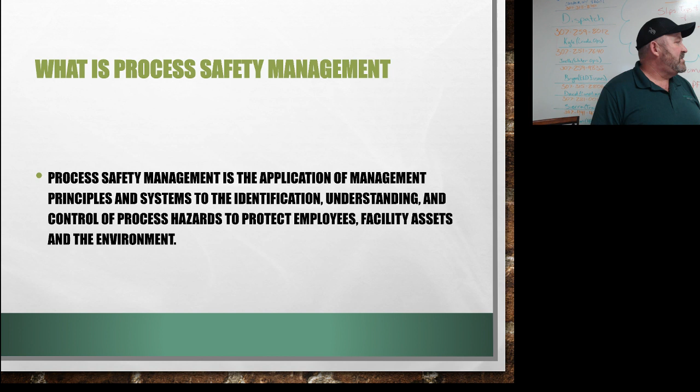This week is one of our OSHA 1910 required topics, which is process safety management. Where did all this stuff come from? It actually happened out of, where the heck was it, a chemical release in Bhopal, India, where over 2,000 people died from a release of a chemical. Businesses have an obligation to protect their employees, but they also have to build a plan to make sure if we had an incident, it doesn't grow huge. So basically, it's to avoid that. You build a process to avoid that.

There are 14 elements involved in process safety management. It's pretty much an elemental approach where we apply things and get employees' participation in it. Then we process the safety information as to what kind of volatile stuff we're working with.

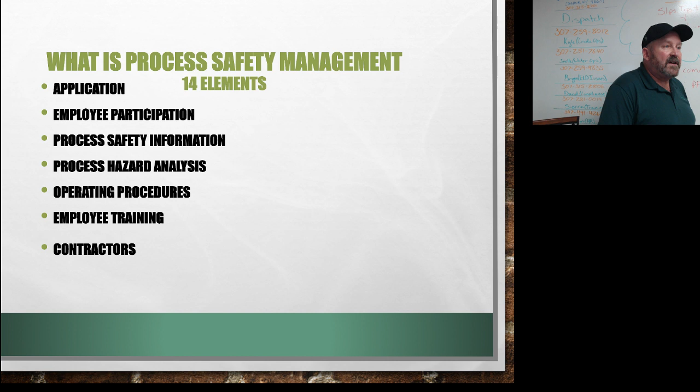A hazard analysis, just like your JSA. Our operating procedures, we do employee training. We have to train our contractors in this program also. Then pre-startup safety review is if we're starting a new process, we need to review it. Have we mitigated all the potential hazards, problems, issues? We want to talk about mechanical integrity of equipment and the conditions it's being used in. If we got hot work permits and stuff going on, non-routine tasks like confined space, we got to talk about that. And management of change, incident investigation, and emergency planning and response.

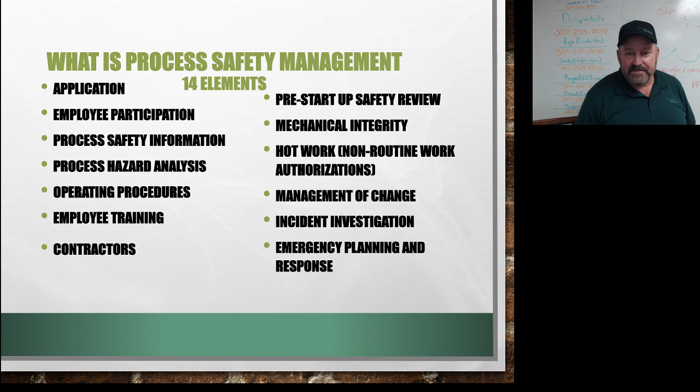So, do we have this program in place at Prairie? Any ideas? I'd say yes. Yes, we do have it in place here. Some of the stuff we do does not require it, but we do have it in place, and we try to keep it updated and working properly.

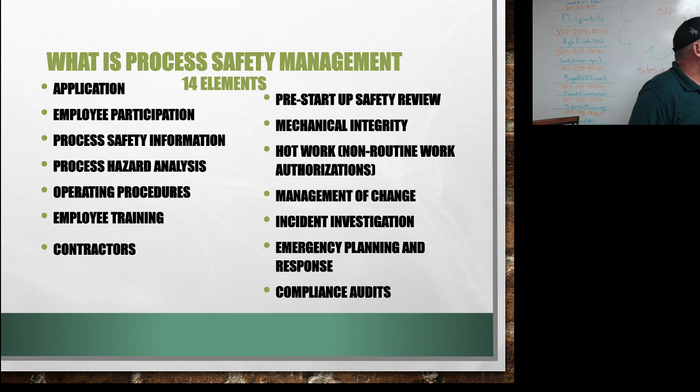The big thing is because of these compliance audits. Not only DOT, but OSHA, all of those good folks that kind of intermingle. I'll talk about them because those are the spider webs. Part of the stuff you do is DOT governed, part of the stuff you do is OSHA governed. What are these elements into this stuff?

If my thing will go forward... there we go. It's the Federal Regulation 1910.119A. It's the application of a program. What it talks about is listing toxic and reactive agents in your work area and what happens to these if there's a catastrophic event.

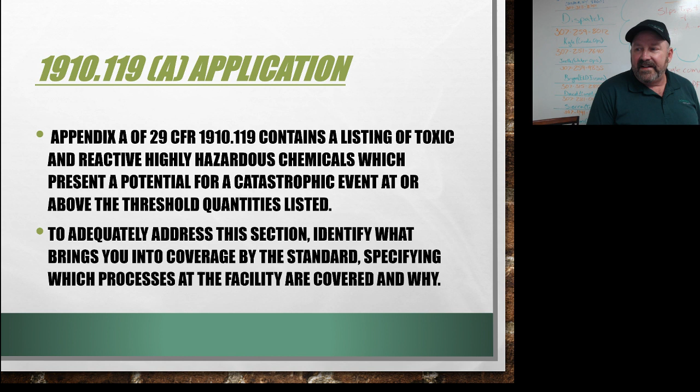We want to let people know what we have around here, and we want to teach you what to do in case of a situation. You know, like do we want to store 10,000 gallons of motor oil here? Probably not, because then we fall into this realm of different reporting and processes if there's a release.

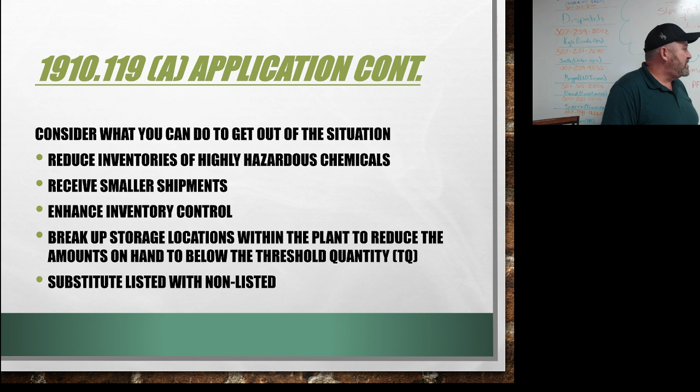We don't hold the amount of chemicals in this facility, or the Texas facility, or Gillette, to warrant this full-blown program, but if we do run it, if we do have issues, OSHA looks at that very kindly. This was a pool chemical process where they had chemicals that were not commercial or reagent grade, so they didn't have to build any kind of safety process, but they had an issue there with chlorine gas and all kinds of issues.

All of us, you're frontline workers, be it in the shop, in the field, even the staff people, we need to make sure you guys know the processes because OSHA knows it, so should we. How do we involve you in this process? Audits. We look at you. Are you following your processes on location?

Part of it is training, when you come in and take classes with Sierra for your annual training. The other part of that is safety meetings, because some of your training comes right from these, that she's able to sign off in ISNetworld that you completed. Anybody have a clue what the fine is for missed safety meetings from OSHA, to the individual, not to the company? $250. 10 grand. Oh, way off. So it pays to come to these things.

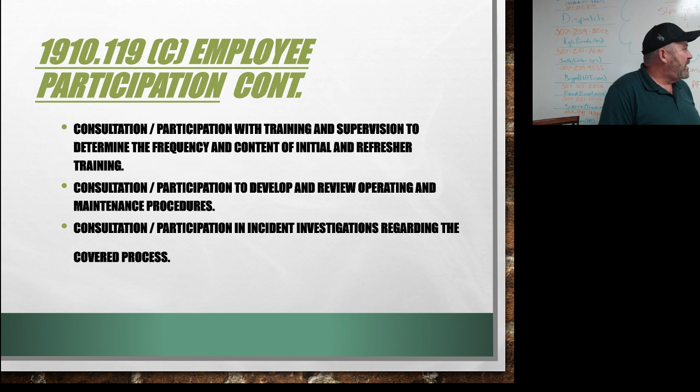So we involve you in that, but we need you to speak up too. If you see processes that aren't right or unsafe, you need to tell us. We need to look at that process to make sure we can mitigate it, try to remove a hazard, or find a safe way to do it.

How many of you have ever grabbed the SDS book there in the shop and seen what we have in this building? There's every SDS of everything in here because we're a commercial building. So yes, you will find the Glade air freshener in the bathroom's SDS in that book. You don't have to do that at home, but we're a commercial business, so we have to have all that stuff in there.

And that's another one of those dead trees that OSHA likes to talk about - nobody ever checks it, goes through it, makes sure you're current with everything. We should be looking at that every time we bring in new chemicals and all that.

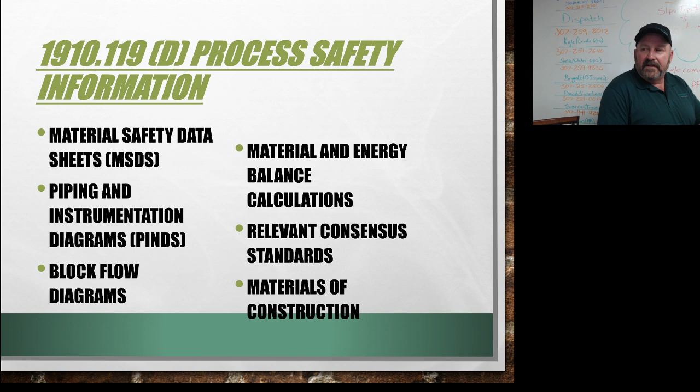You know, all the diagrams, materials and energy balance, they're talking about lockout, tagout on some of that stuff. We need to follow all those requirements in the 1910 series. But it really encourages you guys to participate in this process.

And then OSHA likes to use the term process hazard analysis. But you guys do it every day, don't you? What's the first thing you do when you get to a location? You have to fill out a JSA. Yeah, absolutely, you have to fill out that JSA.

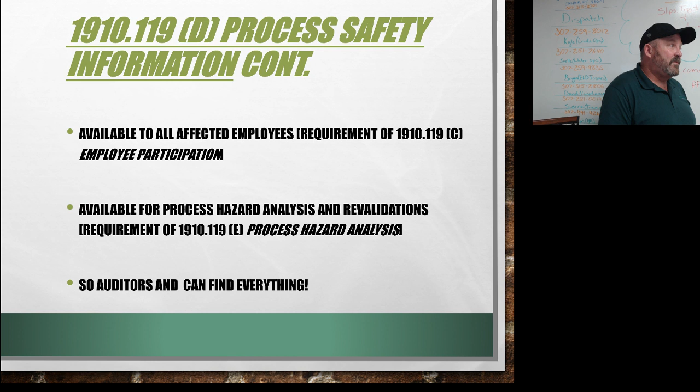And we need those so there's a paper trail that an auditor or an inspector can follow and find. We have to have those available to them, because without them, we're not following the proper processes. Because again, we don't want this kind of thing to happen.

You sit down, either you're just looking at a JSA, looking at your hazards, or two or three or more of us working a task together.

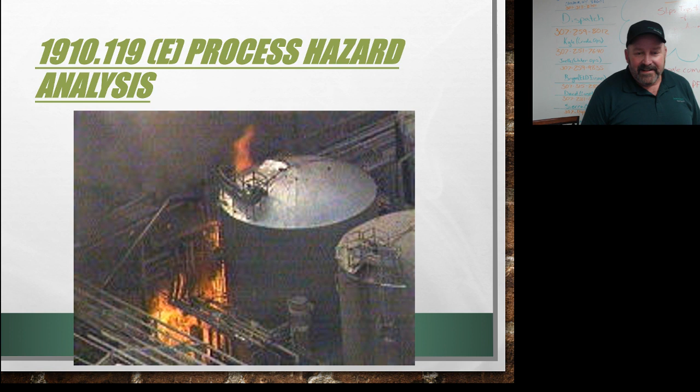And who should participate in this JSA, this risk analysis program? Any clue? It's anybody and everybody that's involved in the task at hand. They need to participate in that.

There's a lot of OSHA suggested formats. A JSA can be just as simple as writing it on a notebook paper, but you have to be able to turn that in so we can file it. Some of you come from companies that have a tremendous JSA program that takes you longer to fill out than it does to do the task.

We don't, in our world, we're not that in-depth with it. But if it's something new and different, maybe you should think of some other hazards that could be out there, because if you have a question on it, you know somebody else probably does too.

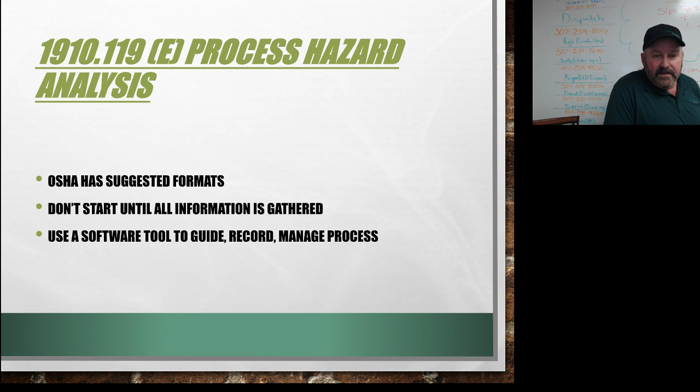They recommend using software programs and that, but we can build our own off of spreadsheets and everything else that's out there. But don't start a new process until all the information is gathered and processed, and we can make sure that we can do it safely.

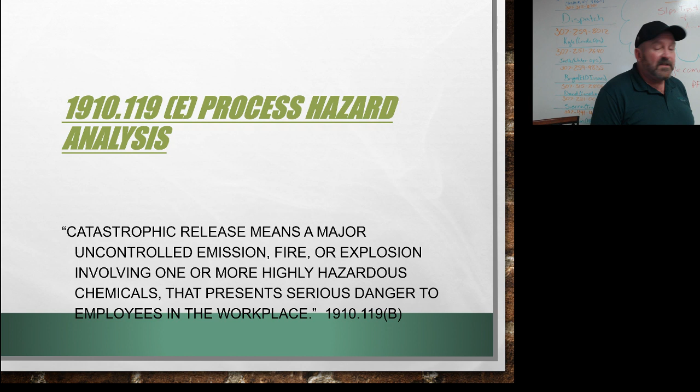That is being worked on. Kyle's up on that with Devin, because we don't want to have to roll in and see that.

So some of the operating procedures, we have to build that into our SOPs - this is how we're going to do business. And we need to do that process in tandem with some of the other stuff going on. It also needs to mesh with our training program, that Sierra's teaching you one way to do it, and that's what's going to happen in the field, by the field trainers, in the shop, whatever.

And there's some cool things out there that say partner with quality teams such as the ISO 9001. The ICS series are classes you can take online through OSHA and FEMA. They're free of charge, you can take these things, and it helps. There's different levels in the ICS training.

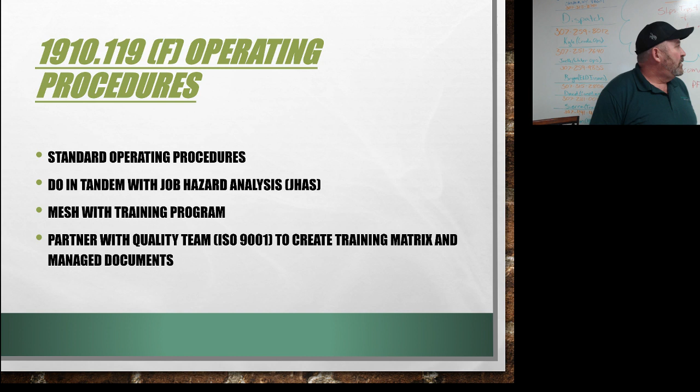As a first responder, all the way up to management of a huge scene for hazmat, you name it - there's all kinds of stuff in there, and it's free training. You just have to register as a student with either OSHA or FEMA, and it's free.

We need to document what Sierra does in ISNetworld of who you are. You've attended this training. Every week after the safety meeting, she's marking all you guys off in ISNetworld that you attend this training, be it online, be it here. You're all getting credit for this with the dates and everything, and your signature on that paper saying yes, you understood the training.

There are some certain things that there has to be annual refresher training on, and this is one of them. We'd much rather do it in the safety meeting than pull you guys off your jobs to come sit and listen to a process safety management class.

Absolute requirements, there's our documentation. We have to have it documented, not only for DOT but for OSHA, of every bit of training you went through. I have to be able to provide that to an investigator. Same with the contract employees, all the leasers - we have to be able to provide OSHA inspectors or DOT inspectors their list of training.

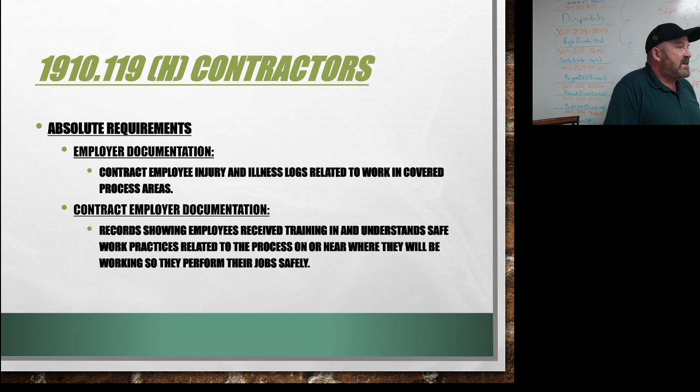There's a comment online that says in the settings of the DC Driver app, there's an option for filling out a JSA after the fact. Yes, and that comes in really good. Say a producer shows up and you already had submitted your original JSA - you can submit that second one and make sure they sign off on the JSA. I've done audits and had a few of you guys say, hold on, let me brief you on my JSA and please sign it. That's absolutely the way you should be doing it.

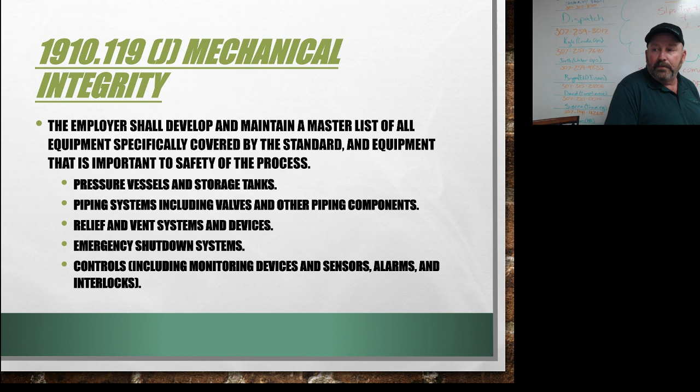And then our pre-safety startup - let's double check, triple check, make sure everything's proper before we get into this new task or procedure that we've never done. And mechanical integrity - we want to make sure the equipment is in a condition to be able to do the job properly.

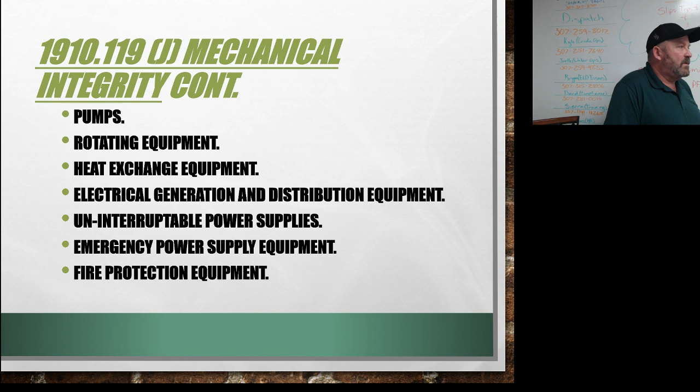From pumps, rotating equipment that create all kinds more hazard - I'm looking at Justin with a hood on back there. If he were around a drive shaft or something, would we want that back there? Probably not want it tucked in, something that could get grabbed into those. I've seen incidents where people have been sucked into drive lines or impellers or that kind of thing.

Any type of hot work - welding, grinding, cutting - there's a whole line of training you got to go through for that, from fire watch to the welder to whatever. But we have the big processes for that.

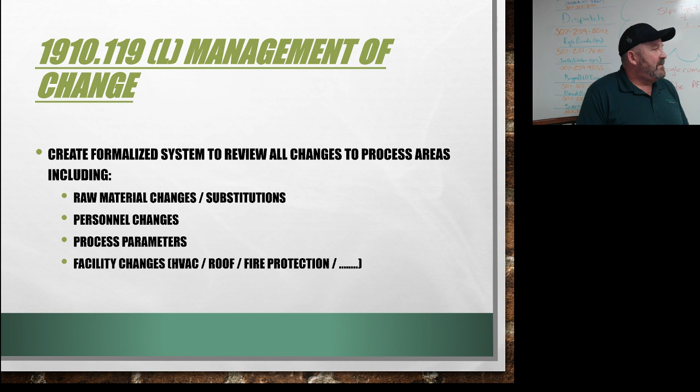When we have to do something that we cannot mitigate safely to do the task, we have to do a management of change. We have to come up with ways to do it properly and as safe as we possibly can. We have to submit that to management with your process of how you're going to do it, how you're going to mitigate the hazard and complete it safely. Those are a one-time thing normally, for bizarre, strange, off-the-wall type things you're going to do.

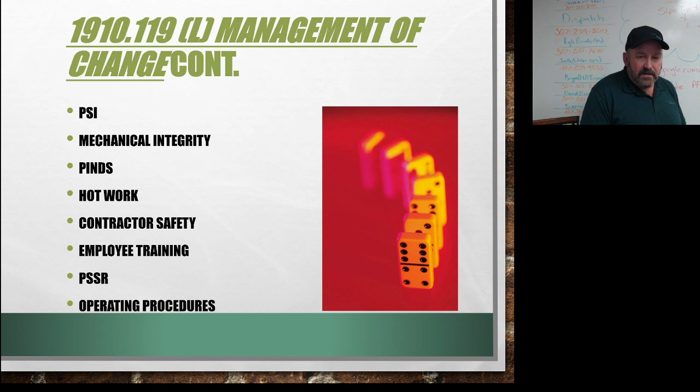Some of the things you got to think about: if you're working under pressure, PSI, the mechanical integrity, all of that kind of stuff - we have to make sure we have it documented in a training program for our process safety management. It all kind of falls in there on how we retain reports and everything.

And the compliance audits - if we have all this documentation, it makes an audit go so much easier. Because all we do is produce it, they look at it and go, good, everybody's current. But they like what they call low-hanging fruit. They find that one thing that's not right, and they dig deeper and deeper and deeper. Because we don't want that kind of stuff to happen there.

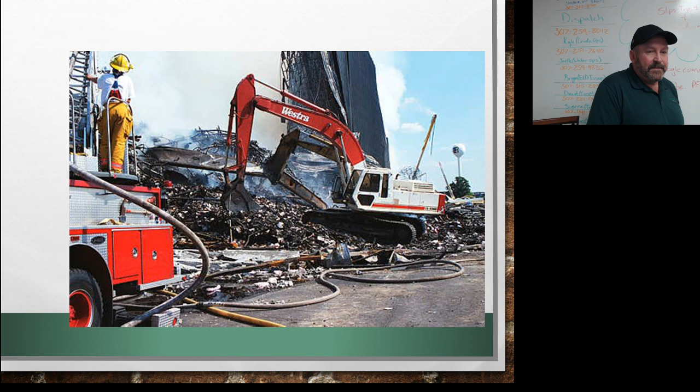I want to show you an incident from the other day that was on Highway 50. We got to start taking better care of our equipment. We have some stuff that gets really damaged by abuse, and it's ungodly expensive to fix this stuff. You wouldn't find a leaser treating equipment this way because they have to pay their own bills. Just because we are a company doesn't mean we can afford to do everything all the time.

Apologize for being a little jumpy here, but you'll get the gist of it.